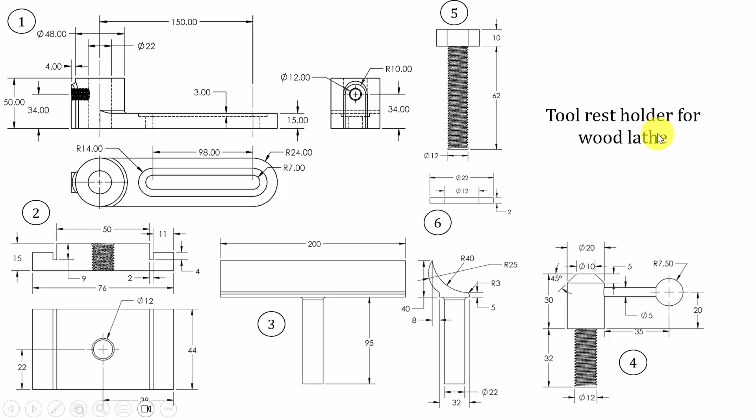In this tutorial, I'm going to show you how to draw the parts and assembly of a tool rest holder for a wood lathe. There are 6 components, so we're going to draw the parts one by one, and finally assemble it. Open SOLIDWORKS, click new and create a new part.

I'm going to start with part number 1. Here I'm going to construct the top view, then extrude this circular section.

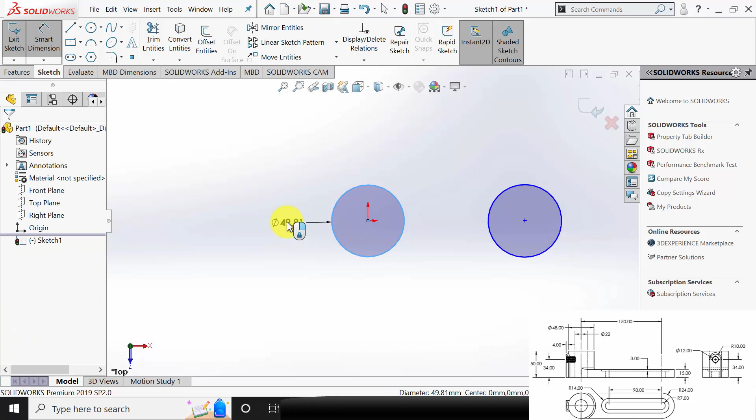Select top plane, click sketch, and draw a circle and another circle with some distance. Go to smart dimensions and mark the dimensions. The diameter of the circle is given as 48. Here also it is 48, and the distance between the two circles is given as 150 mm.

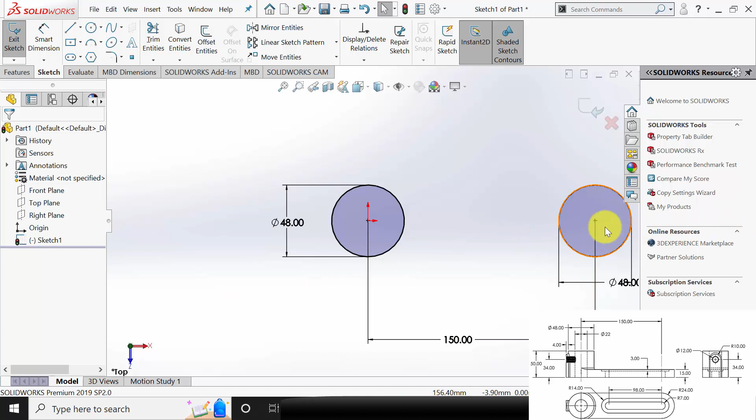Now click Control, select the center points of these two circles and make it horizontal. Now you can see that it is fully constrained. Then select a line tool and draw two lines.

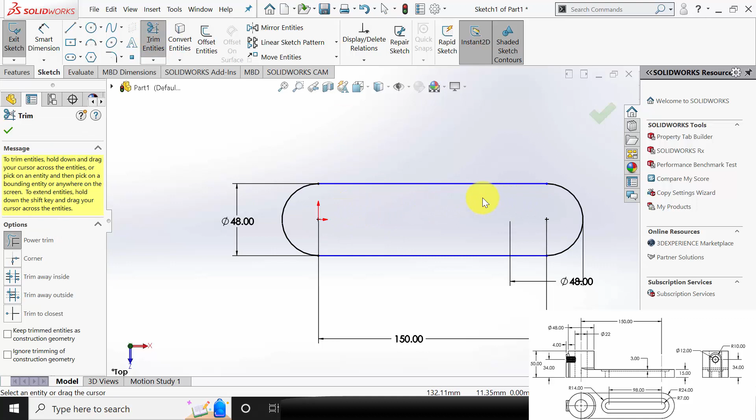Now go to trim entities and remove these inside regions. To make it constrained, select these two lines and make it tangent. Similarly, select these two lines and make it tangent.

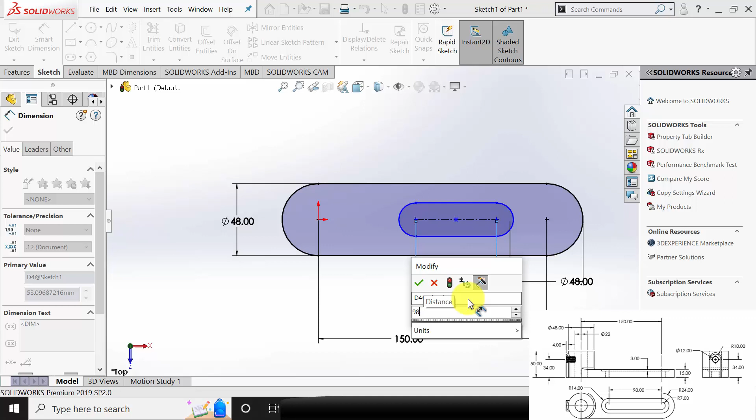Now I am going to draw a straight slot. Select straight slot, then go to smart dimensions. The slot length is 98 mm, and the slot radius is given as 7 mm. Select Control, select these two curves and make it concentric.

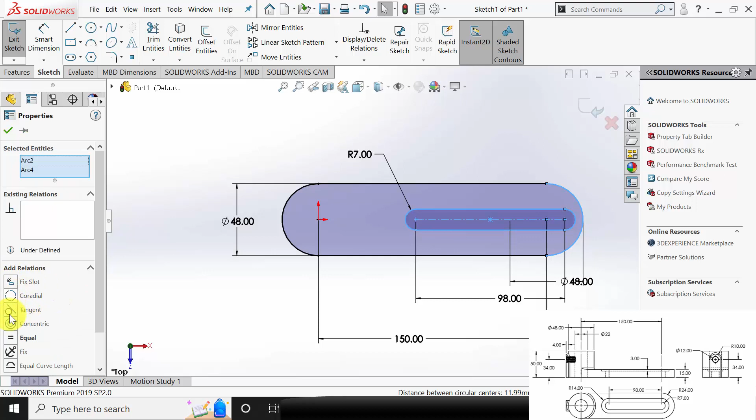Now go to Features, click Extrude Boss, and extrude this to a height of 15 mm.

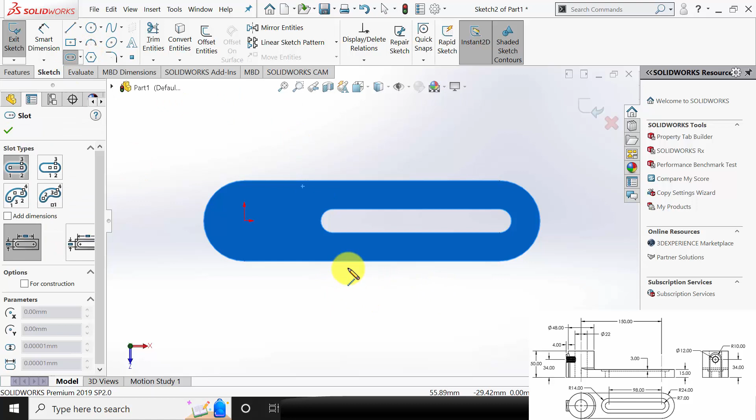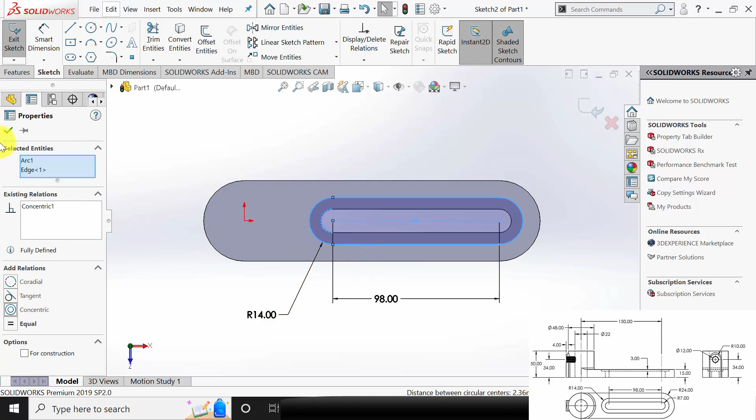Now click the top sketch, select Sketch and draw another slot. Here the slot radius is given as 14 mm and the slot length is the same as the previous one, 98 mm. Select Control, select these two curves and make it concentric. Now go to Features, click Extruded Cut and extrude this to a distance of 3 mm.

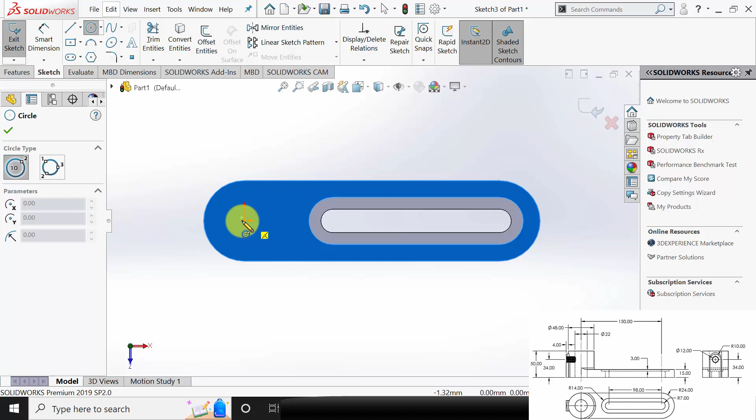Next I am going to draw the projections here. Select this surface, click Sketch, and draw a circle with the same radius. You can check that the diameter is 48 mm.

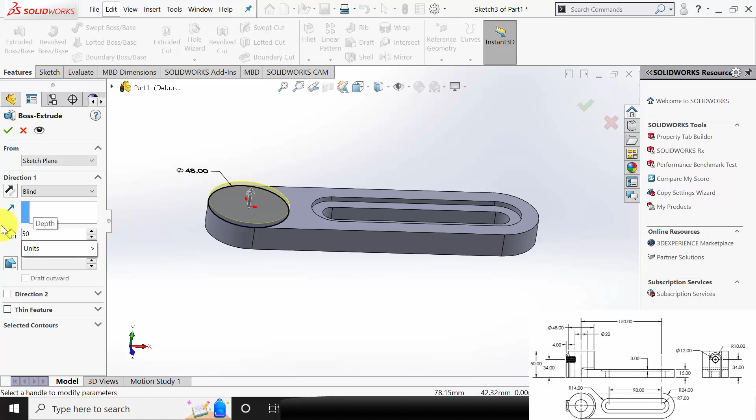Now go to Features and extrude this to a height of, since we already have extruded to 15 mm, it is 50 minus 15.

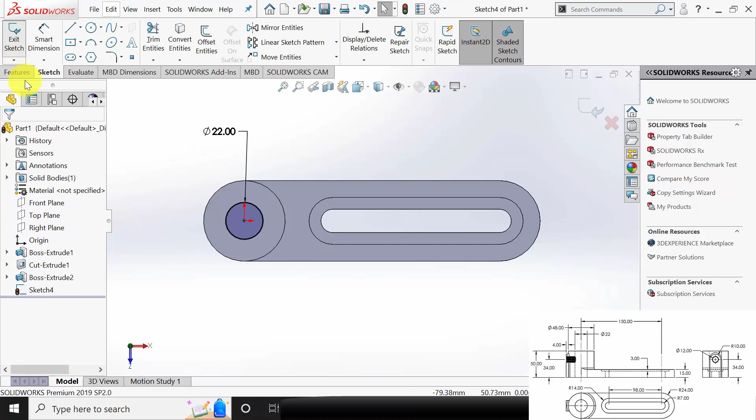Now select this sketch and draw another circle, and the diameter is given as 22 mm. Go to Features, click Extruded Cut and select Through All.

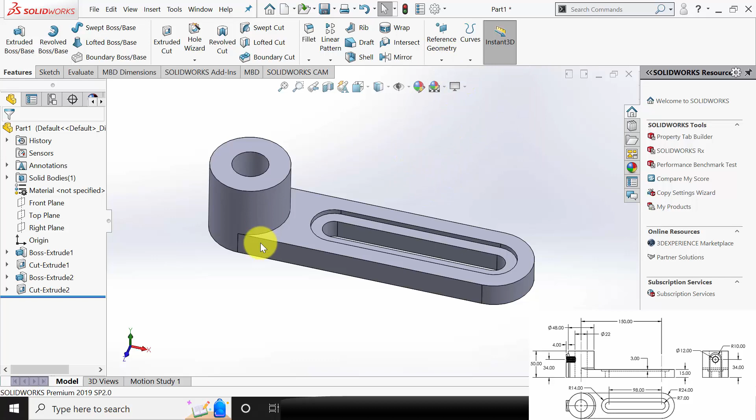Now I am going to draw the sections at the left side. For that I am going to create a plane. Go to reference geometry and select plane. To draw the plane, I'm going to consider the right plane as my first reference, and from that, moving it to a distance of the radius of the circle plus 4 mm, so 24 plus 4, in the opposite direction.

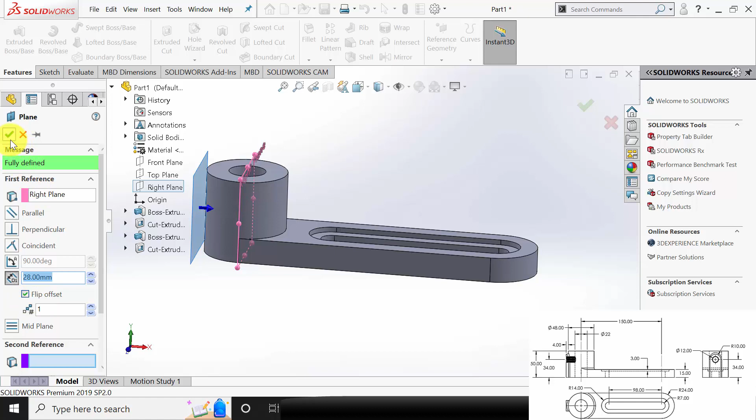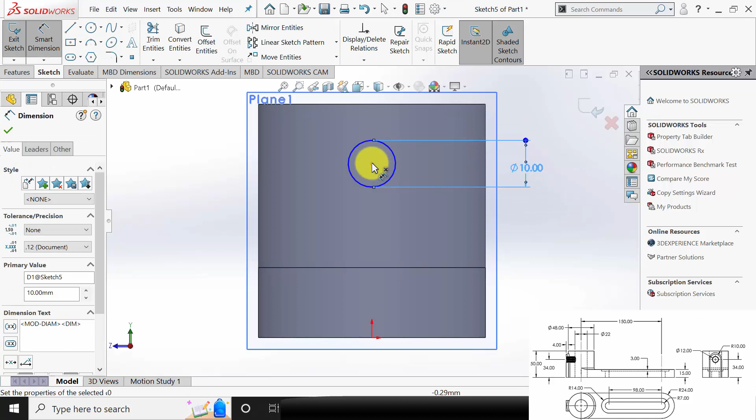Now select this plane, click sketch, and draw a circle. The circle radius is 10 mm and it is at a height of 34 mm from the bottom surface. Now select control and select these 2 points and make it vertical.

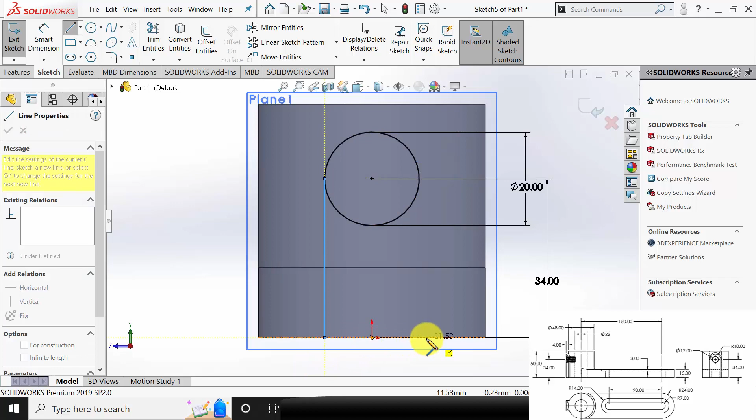Select line. Sorry, here the radius is given as 10 and the diameter is 20. Now select a line and connect these points. Go to trim entities and make this trim.

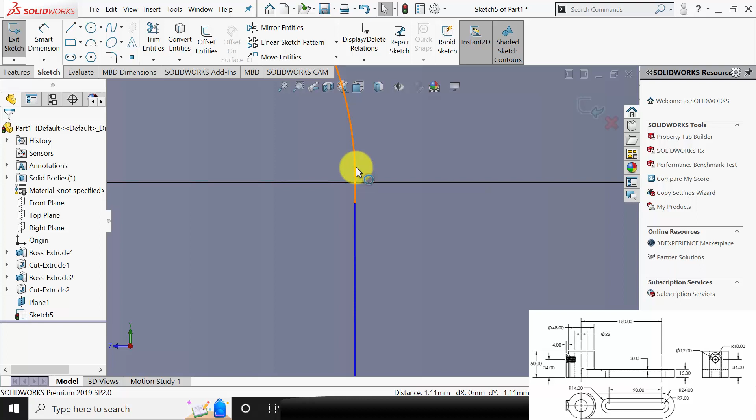So here I made a mistake, you can see that. To correct this, select control and select the 2 center points and click merge. Further select these 2 curves and make it tangent.

Okay, fine. Now go to features, click extruded boss, select up to the surface, and choose this surface.

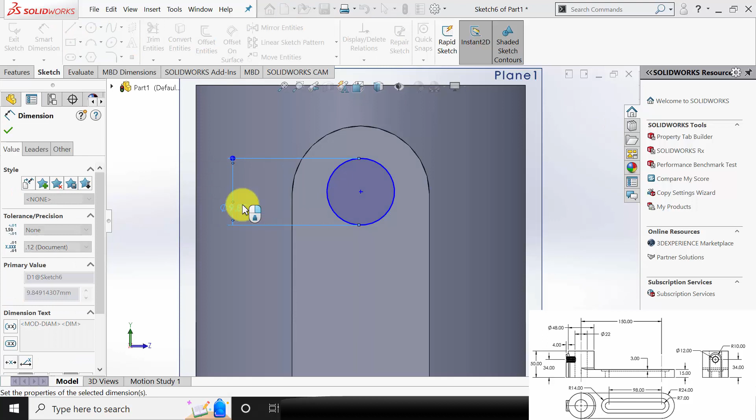Next select the surface, click sketch, and draw a circle. There is a hole and its diameter is given as 12 mm. Now select control, select these 2 curves and make it concentric. Go to features, click extruded cut, select up to surface, and select this surface.

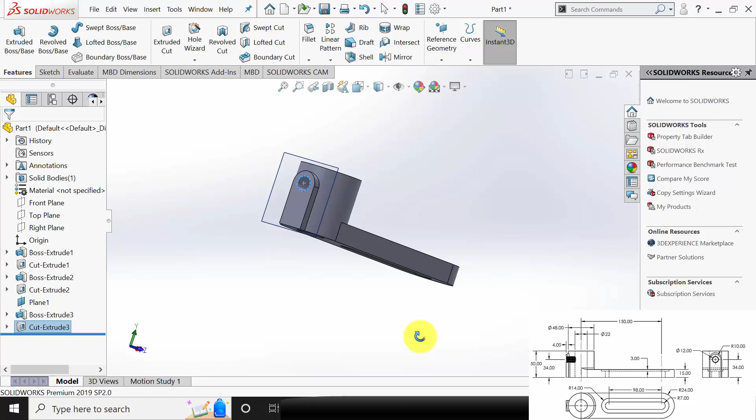Next I am going to fillet the edges. Go to fillet. The fillet radius is not specified in the drawing, so I am considering a 3 mm fillet. I am selecting this surface, then click OK. So you can hide this plane.

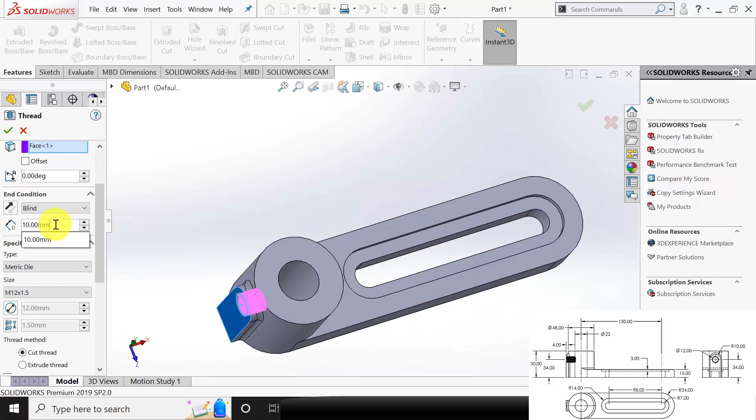Next I am going to create the thread. Go to hole wizard, select thread, and select the starting edge, then the starting face. You cannot select the up to selection, so you can go with blind and roughly type 10 mm.

Okay, so you can see that. Then select extrude thread, and you can trim with the start face and trim with the end face. Okay, now you can see that.

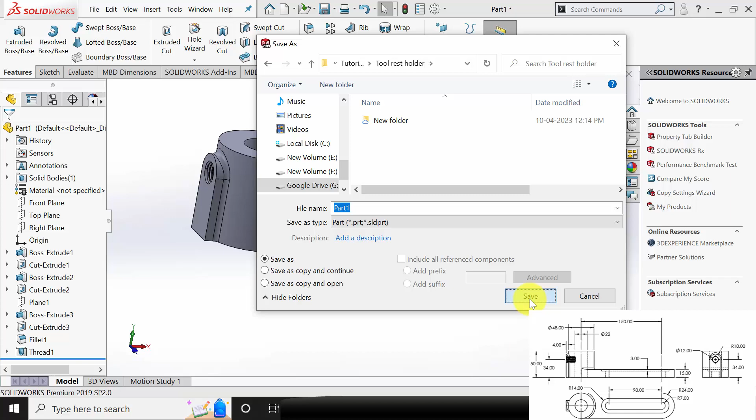Now I am going to save this. Save as part number 1. Now close this. Click new and create a new part.

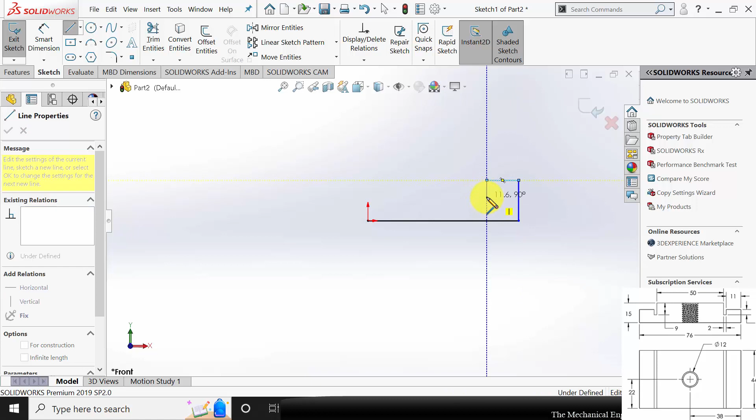Select the front plane, click sketch, and draw the outline of part 2. I am going to draw one side and mirror it. Go to smart dimensions and mark all the dimensions.

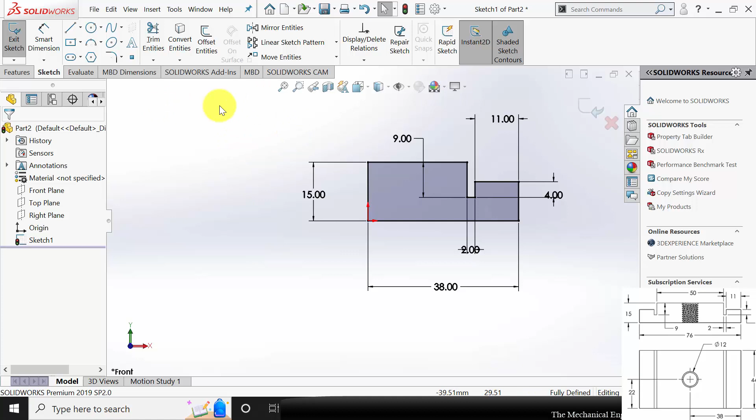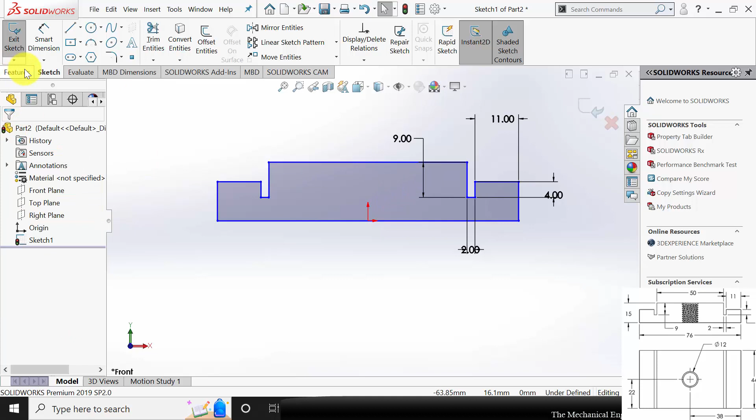Now go to features, click mirror entities and select the entities to mirror. Now mirror about this reference line. Click OK. Go to trim entities and trim this center line. Go to features, click extruded boss and extrude this to 44 mm.

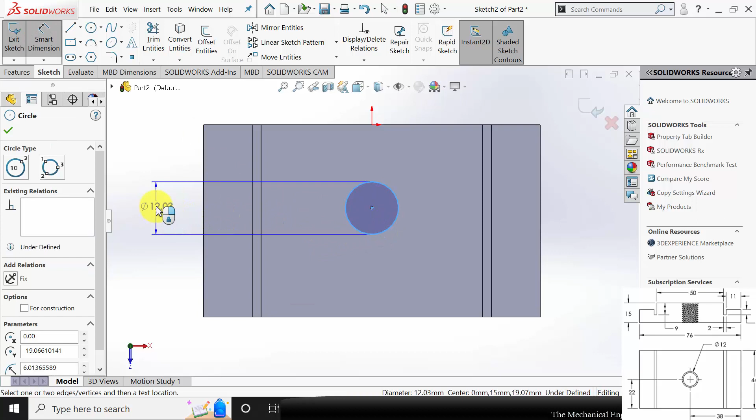Next I am going to draw the hole. Select the top surface, click sketch, and draw a hole of diameter 12 mm and at a distance of 22 mm. Now select control, click these two edges and make it vertical.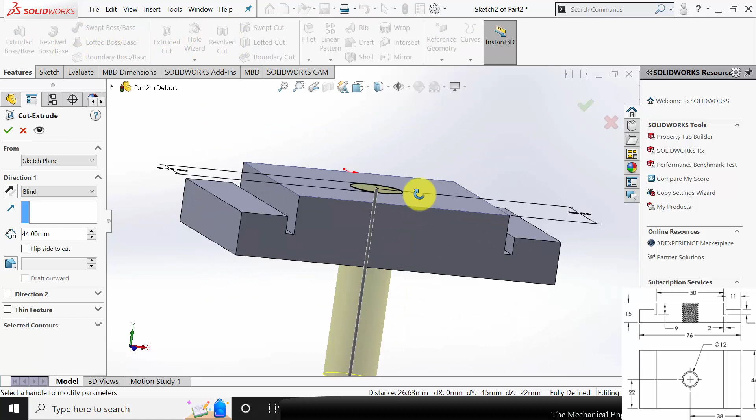Go to features, click extruded cut and select through all. Next I am going to create the thread. Go to thread, select the starting face, and we are going to extrude the thread, trim with the start surface and trim with the end surface.

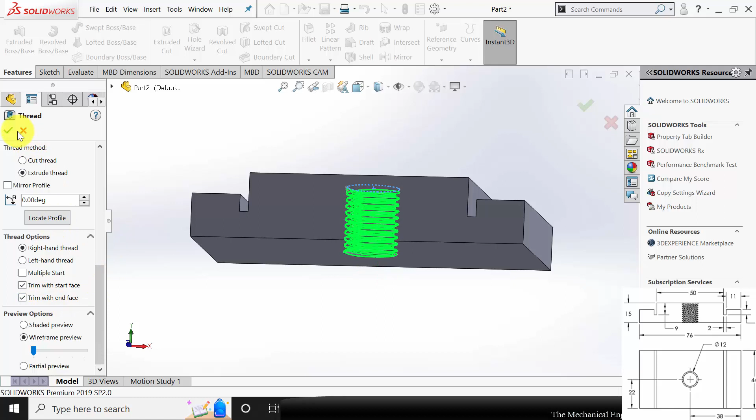Now go to save as and save this as part number 2.

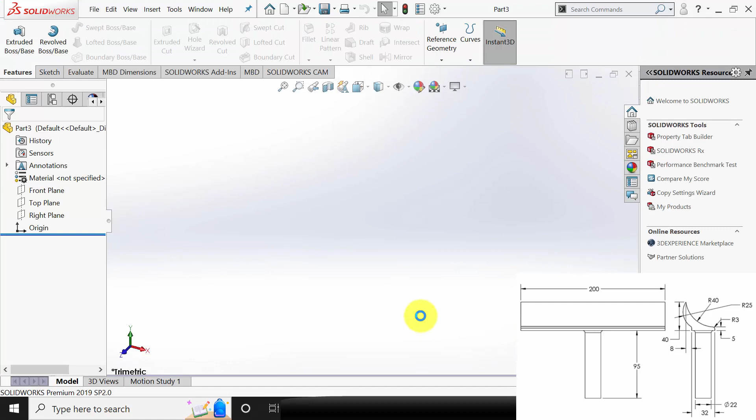Next create another part and I'm selecting the front plane. Go to line wizard and draw a line. And draw two curves.

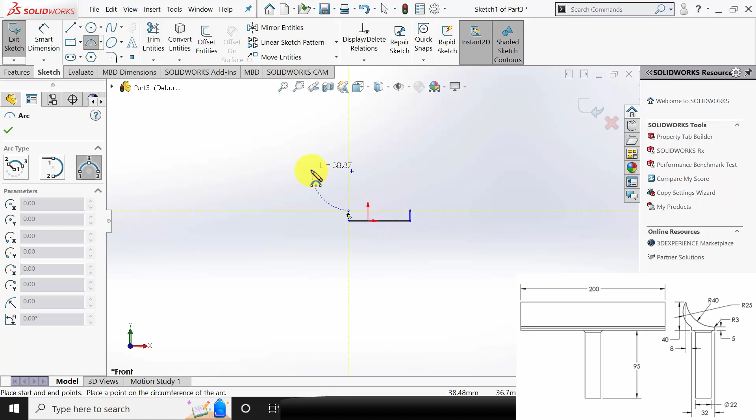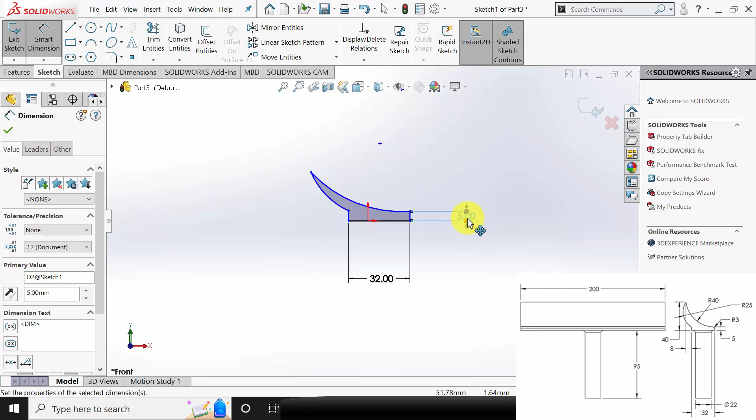Next go to smart dimensions and mark the dimensions. The width is 32 mm and the height is given as 5 mm on each side. Then the distance between this point and the bottom edge is given as 40 mm.

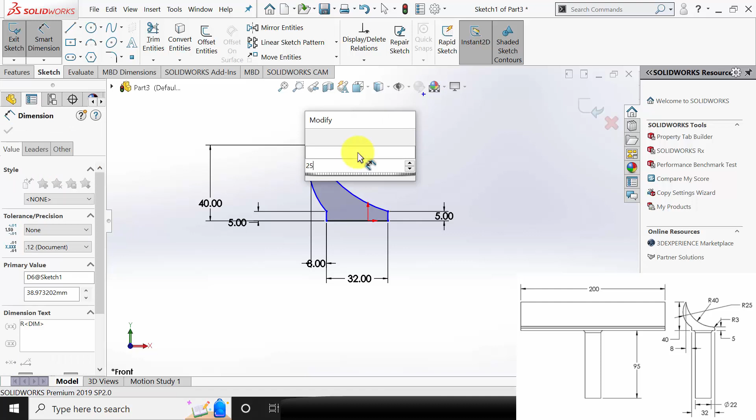Then in the horizontal direction also it is given, it is 8 mm. And the radius of the first curve is 25 mm and the radius of the second curve is 40 mm. And you can center this so that it will be fully constrained.

Go to features, click extruded boss and I am selecting mid plane. Extrude this to a width of 200 mm. Now go to fillet, select these two edges and create a fillet of 3 mm.

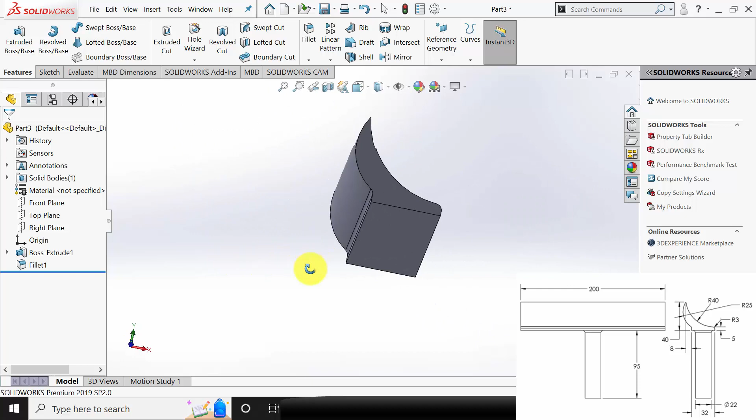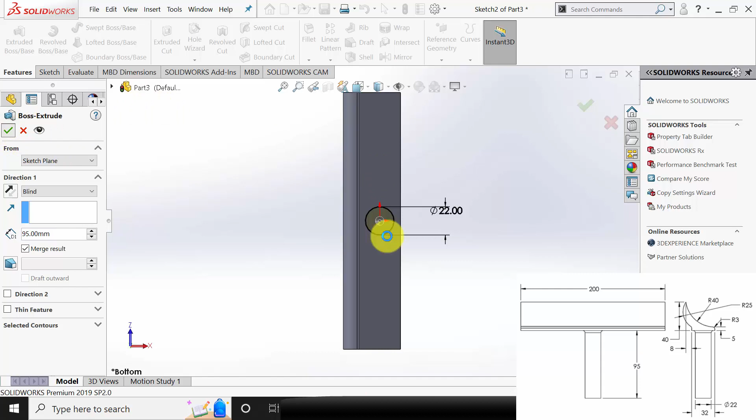Select the surface, click sketch, and draw a circle at the center. The circle diameter is given as 22 mm. Now extrude this to a height of 95 mm. Now go to fillet and select this edge and create the fillet. Now save this as part number 3.

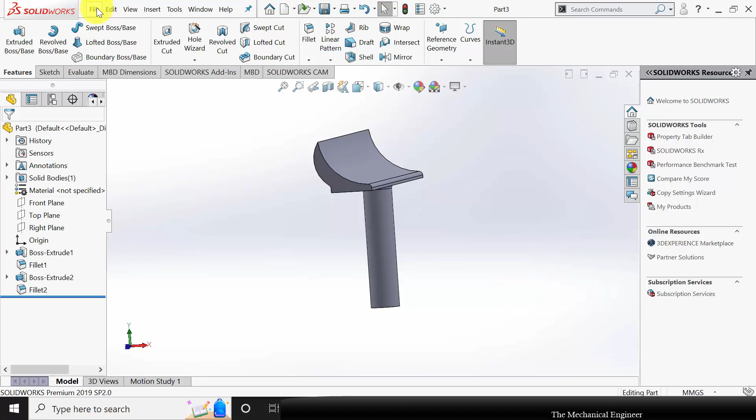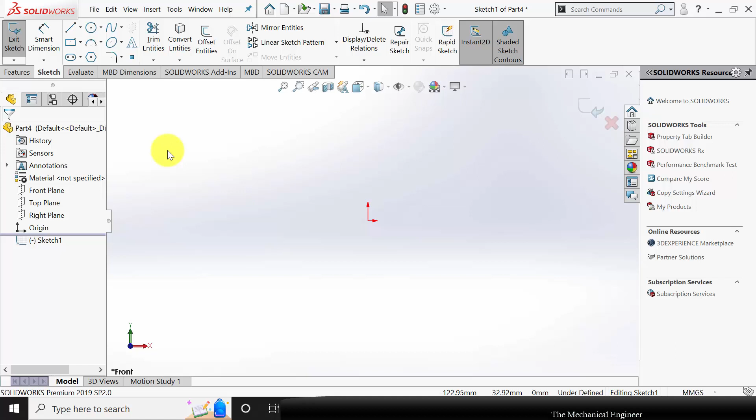Now close this. Go to file and create a new part. Select the front plane. Here I am going to draw one side and revolve it. Draw the outline of the profile.

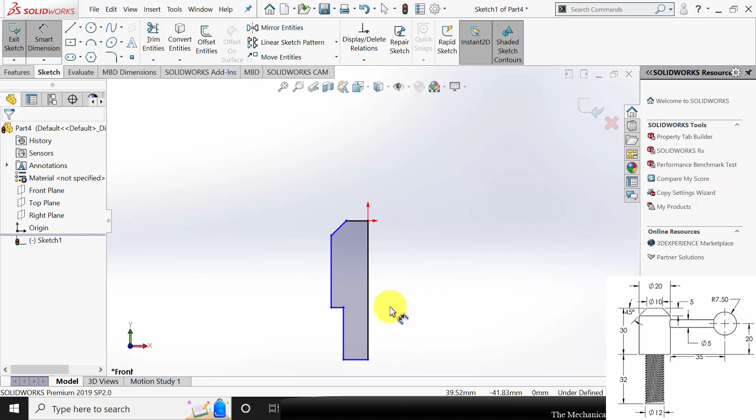Go to smart dimensions and mark all the dimensions. The radius is 6 mm and here it is 5 mm. The height is given as 30 mm and here it is 32 mm.

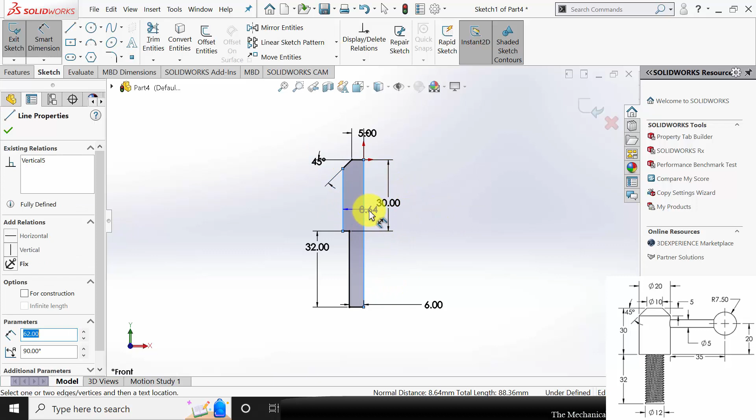Select these two surfaces and mark the inclination. It is given as 45 degrees. Then this radius is 10 mm. Now go to features, click revolve boss and select the center line.

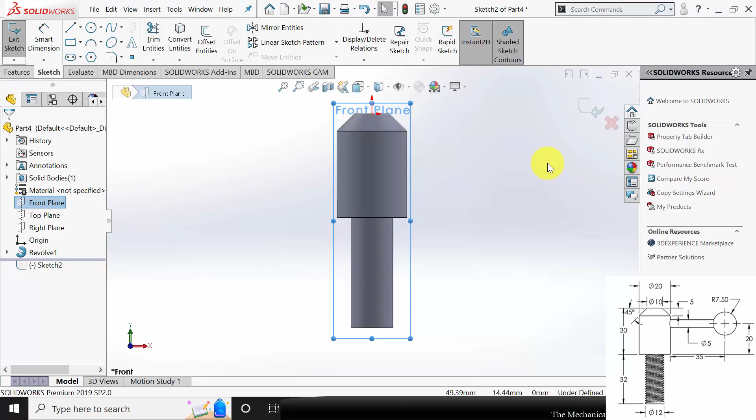Next I am going to draw the handle. For that select the front plane, and here also I am going to use the revolve command. I am starting with a gap and draw a rectangle here and mark the dimensions.

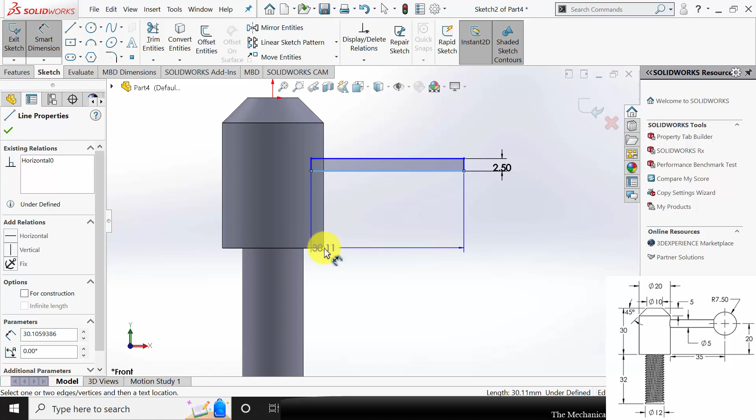The radius is 2.5 and it is at a height of 20 mm from this edge. Select a circle, draw a circle of radius 7.5 mm, so the diameter is 7.5 into 2.

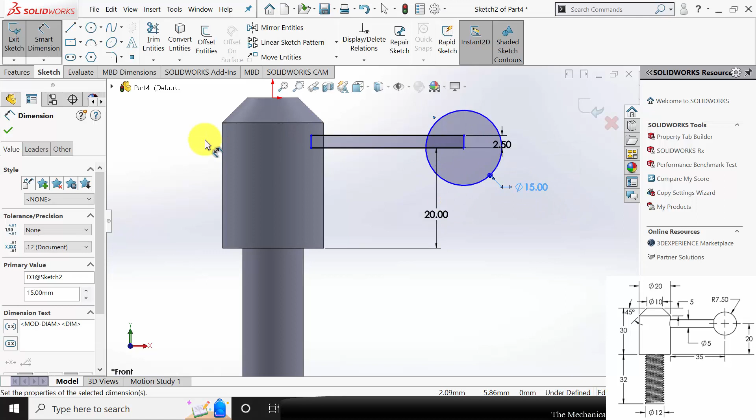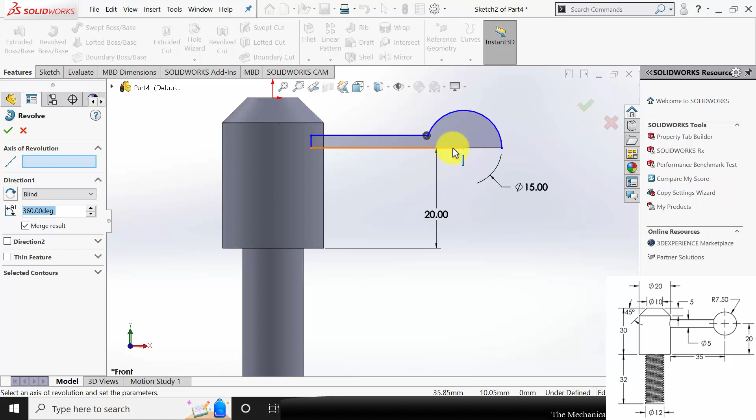Now we extend this line up to this point. Go to trim entities and trim the unwanted regions. Now go to features, click revolve boss and select the center line.

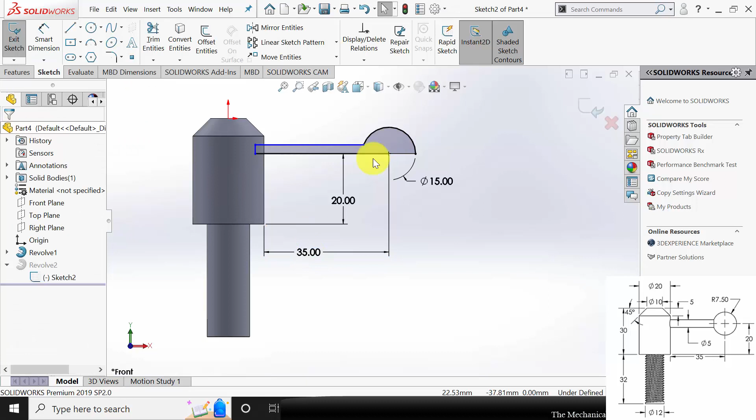So here I haven't specified the length of the line. Go to sketch and choose smart dimensions. This length is given as 35 mm. Now we have created the sketch.

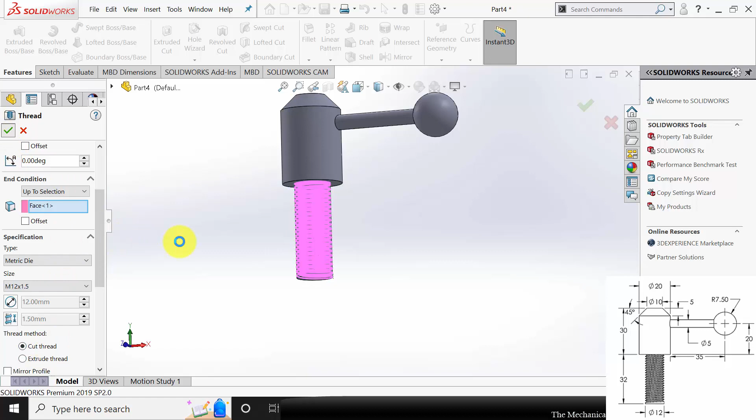Next I am going to create the thread. Go to thread, select the start face and choose up to this face. Here also we are not going to extrude the thread, then choose cut thread. Now save this as part number 4.

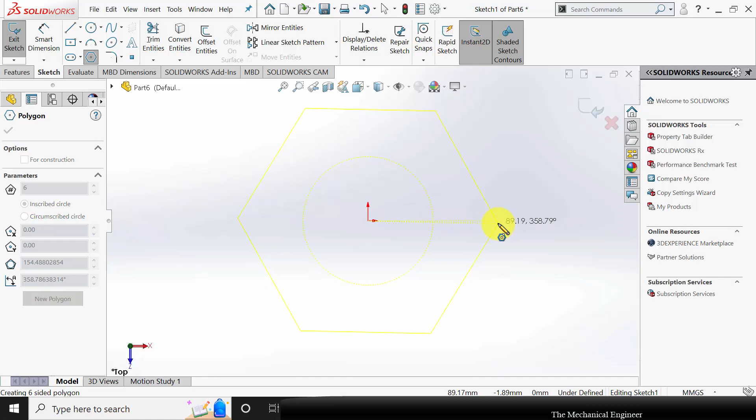Next click new part and select the top plane and draw a polygon. The circle diameter is 22 mm. Now go to features, click extruded boss and extrude this to 10 mm.

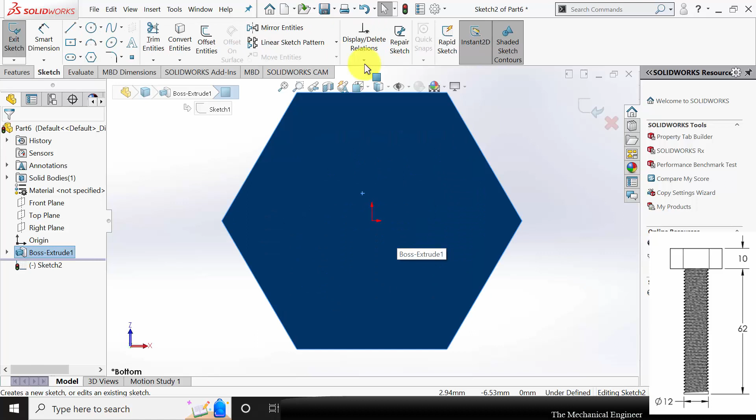Select the surface, click sketch and draw a circle of diameter 12 mm. Go to features and extrude this to a length of 62 mm.

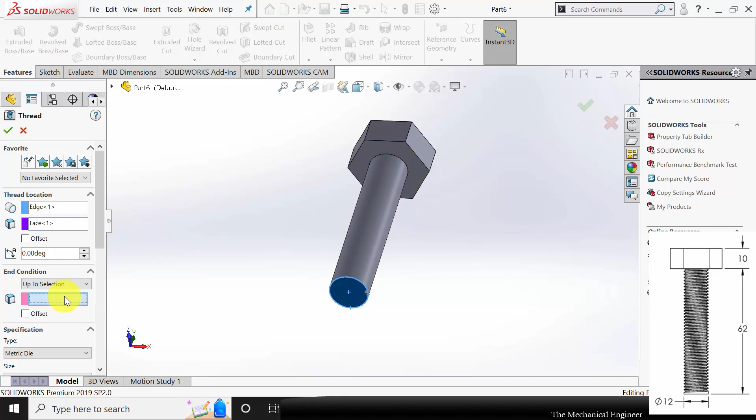Now go to hole wizard thread, select the start edge, select the start face, and choose the end face. Then click OK. Now save this as part number 5.

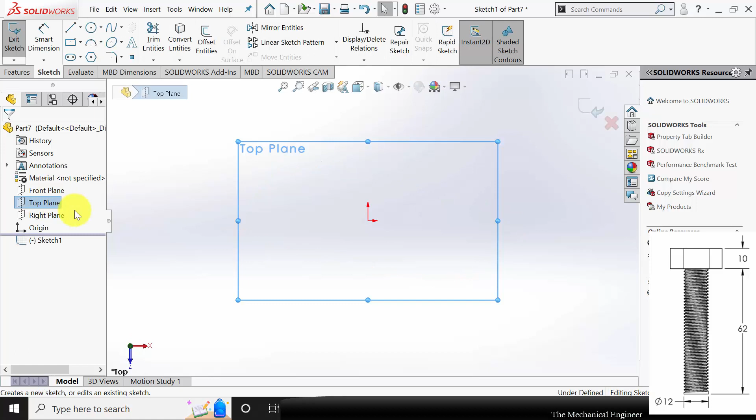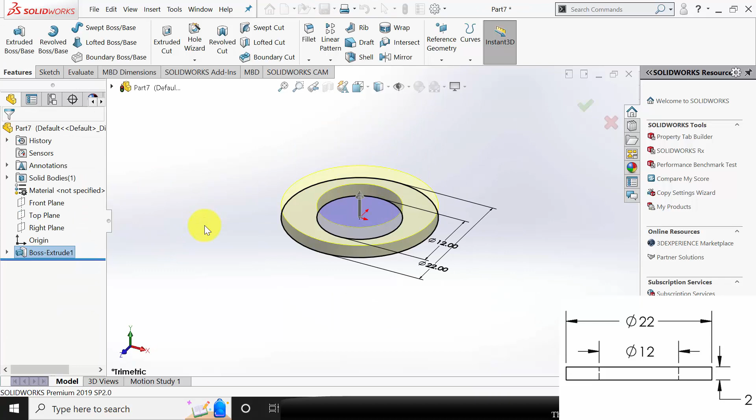Part number 6 is the washer. Select top plane, click sketch, and draw 2 circles. The outer circle diameter is 22 and the inner circle diameter is 12. Go to features, click extrude and extrude this to 2 mm. Now save this as part number 6.

Now we have created all the parts. Next I am going to assemble it. So create a new assembly, and I am selecting part number 1. Now go to insert component and insert a new part.

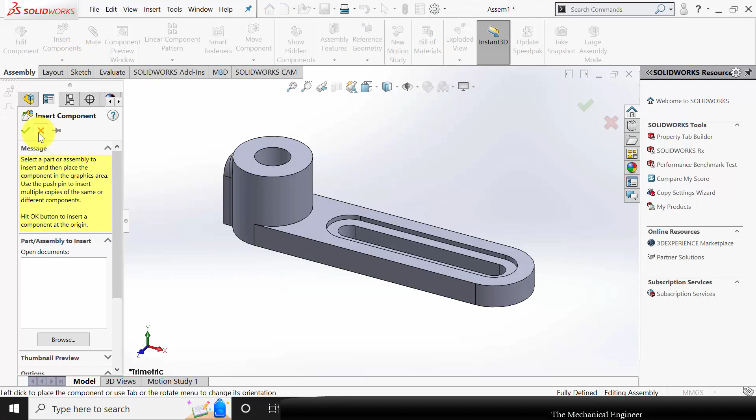Now select insert components and choose part number 2. Change the orientation. Then insert part number 3.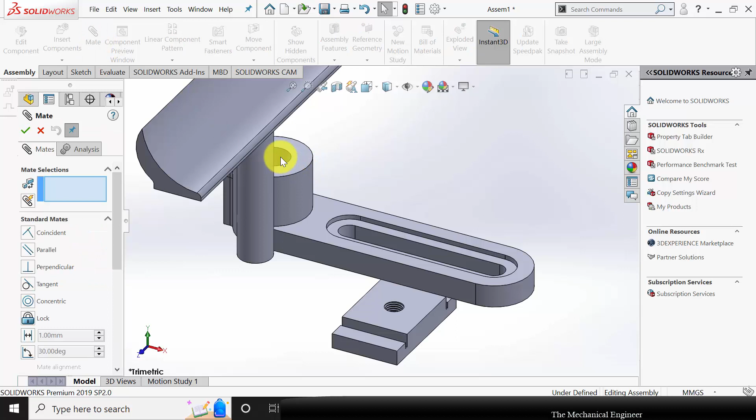Now go to mate and select these 2 surfaces and make it concentric. Then select these 2 surfaces and make it coincident.

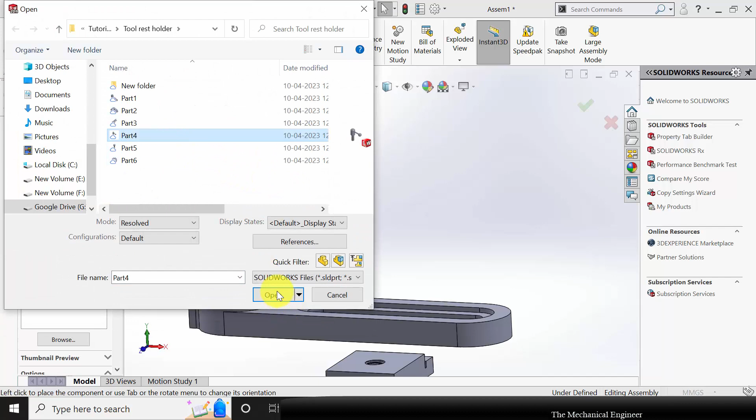Go to insert components and insert part number 4. Change the orientation. Then go to mate. Select these 2 edges and make it concentric.

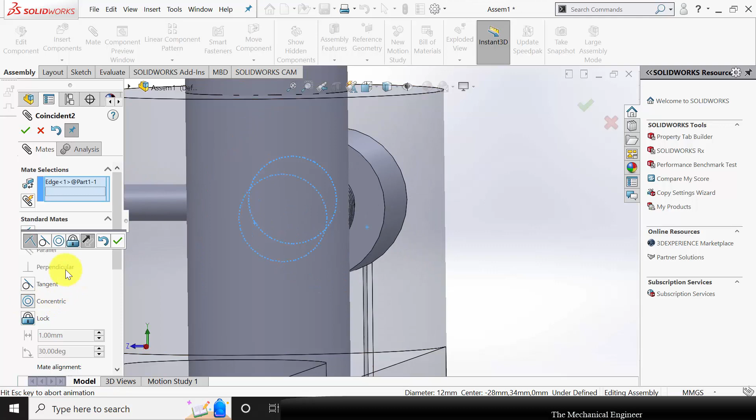Now move this, go to mate and select this edge and the circular surface and make it tangent.

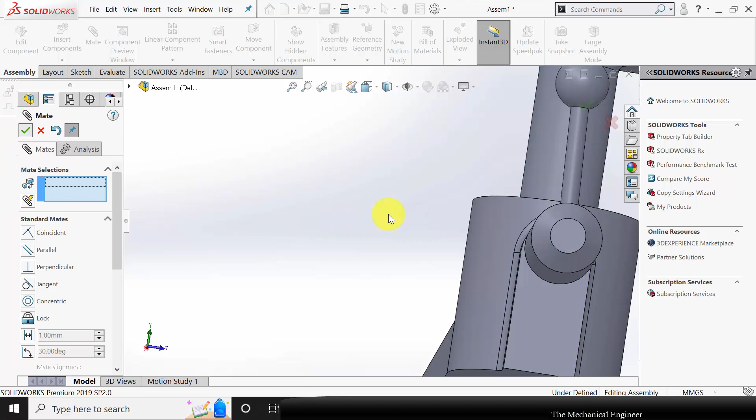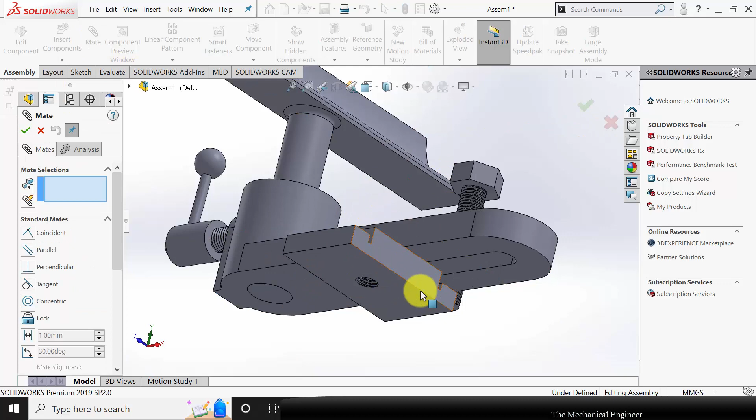Then insert component and insert part number 5. Choose mate, then select mate, then select these 2 edges and make it concentric.

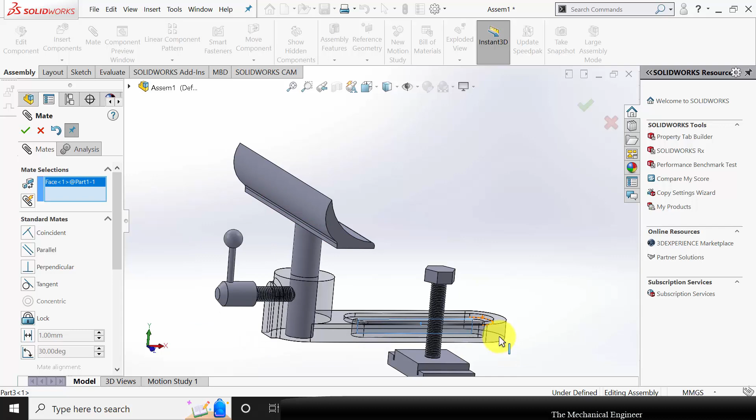Further select this face and the edge and make it tangent.

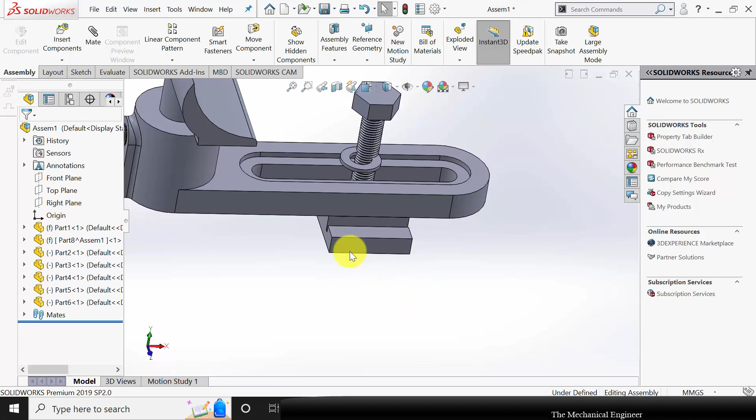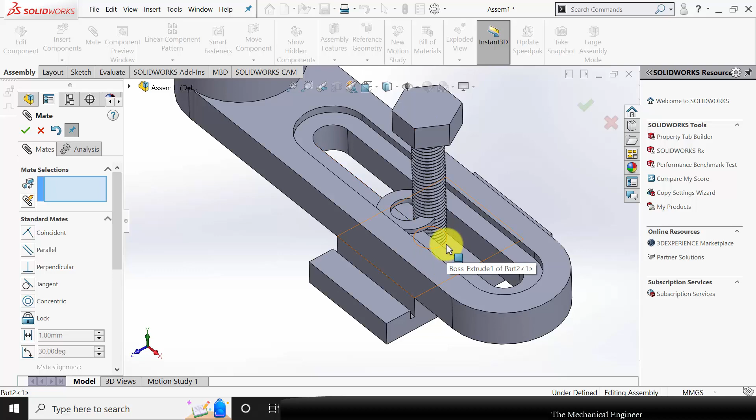Now go to insert components and choose part number 6. Then go to mate and select these two surfaces, make it coincident, and select these two edges and make it concentric.

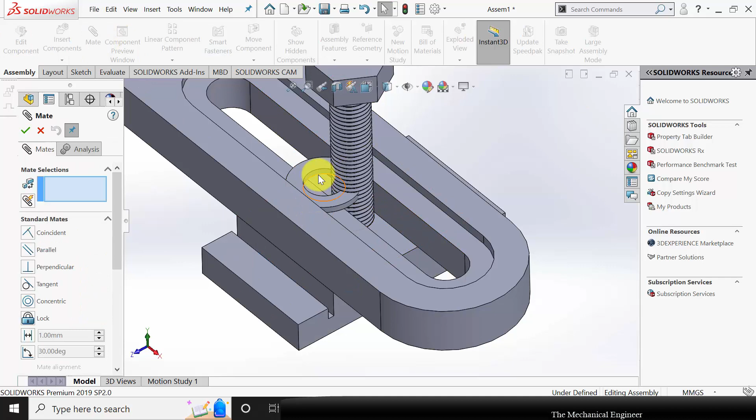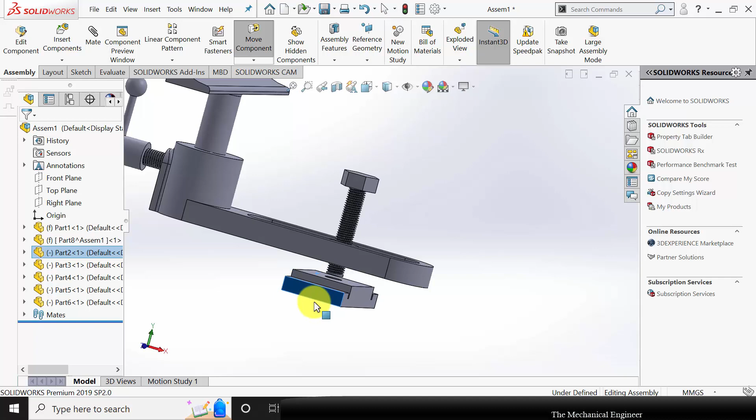Now we have completed the assembly. So this will be moving. To fix this, you can go to mate and select these two surfaces and make it parallel.

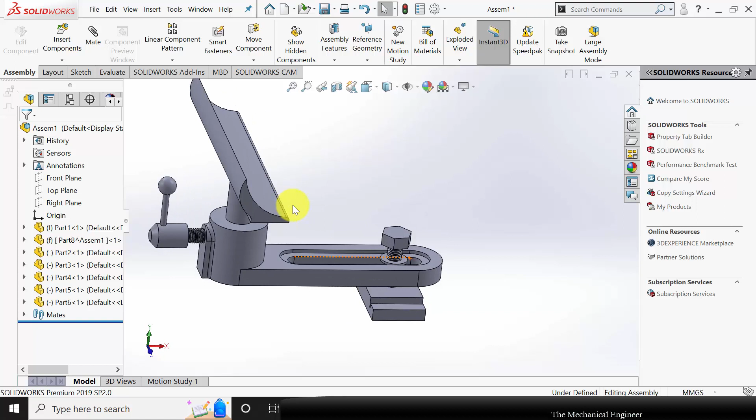And we have not assembled the bolt, because this will be in the lathe tool bed. So this is the final assembly of the tool rest holder for wooden lathe. Thank you.